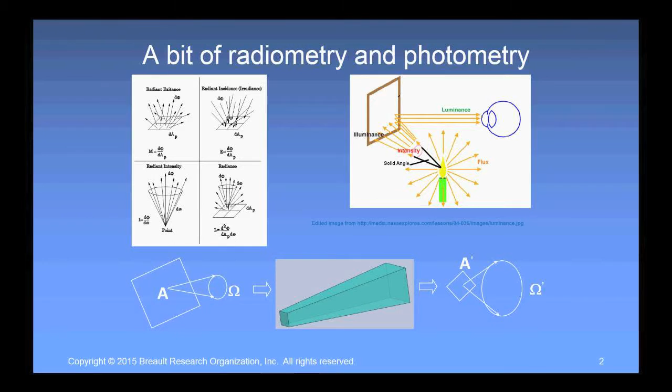And to do that, we're going to take a somewhat brief look, as much as we can within the time frame allotted, at radiometry primarily, and a little bit of photometry as well. We are going to spend some time looking at the terminology, because to be perfectly honest, the terminology can sometimes be the most confusing part of the whole analysis process. And then we'll look within the Apex environment at how we analyze the radiometric quantities, and put them into the perspective of what this data is telling us. So let's talk briefly about radiometry and photometry and what the differences are between them.

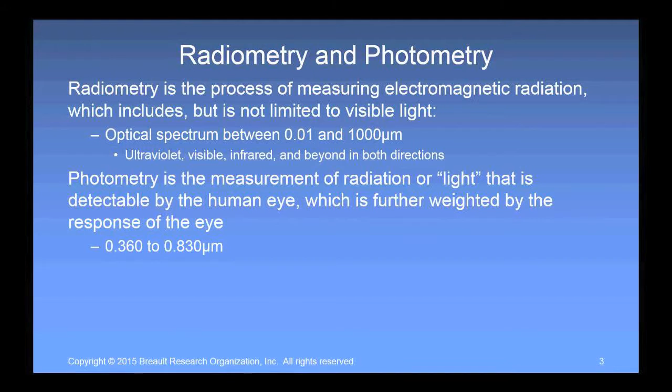So let's take a look at some of the quantities we're dealing with in radiometry. When we talk about radiometry, we're talking about real energy based on the energy in a photon of light. So in radiometry, we start at the most fundamental level, the radiant energy, or the joules per photon. It goes right back to Planck's law. We start with the photon's energy, and what happens to that energy as it passes through time and space?

So you don't always have to say radiant flux. You can simply say flux, and radiometric quantities are typically assumed. But in all honesty, if you want to make sure that people know exactly what you're talking about, I would recommend using the prefix of the radiant. And again, power is also simply often used. And when we're talking about power, we're talking about watts, what comes out of the wall outlet, if you want to think of it in those terms. And based on our fundamental quantity of the energy in the photon, watts is simply joules per second. So how much energy per unit time.

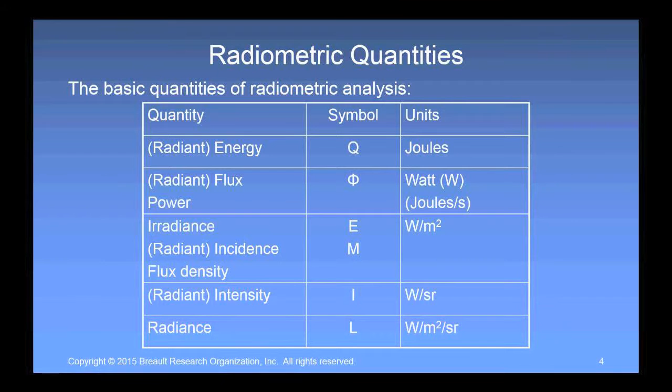So again, just a little bit of terminology. I'll be using those same words when we go through some of the analytical processes. So have that back to refer to. And after this presentation, you'll be able to download this file if you are interested.

So what does this all mean, and how do we apply it to the analysis we're trying to do of our system? And I'm going to say illumination system, but it could be an imaging system or any item that you're trying to analyze within the APEX environment. What I want to talk about is the basic process of transferring radiation, transferring energy. Let's assume we have some small area on our source, and I'm going to call that DA1, and I drew something large enough for you to see, but of course we can shrink these down to infinitesimal size if we want in the limit. And then we have some small differential area DA2 on this region I'm calling my detector. And they may be aligned normally to each other or not, but they're aligned at some angle, theta 1 and theta 2 relative to their normals. And they're separated by some distance s.

What we're trying to determine is how much of the energy that is emitted from this differential area is actually going to be captured on this target, this detector. Right now, it's a simple system, source and detector. Obviously, in the real system, we're going to have many other components involved, mirrors, lenses, etc. But we can still think of it at this very basic system.

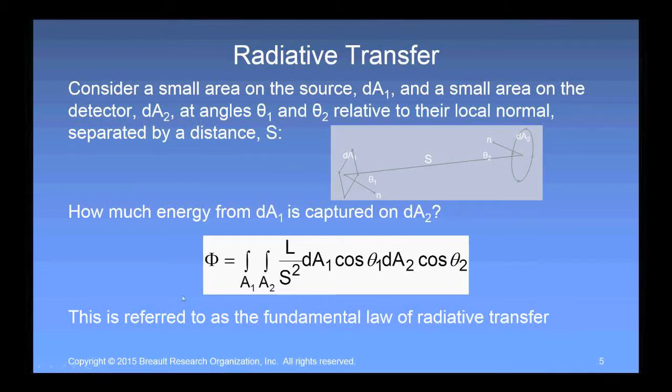So we can look at it mathematically, and we can calculate how much energy from this differential area A1 is captured on our detector by simply integrating over the two areas involved, the radiance divided by the square of the distance, and then the projected area of the source as seen by the target, and the projected area of the target as seen by the source. This particular equation is what's referred to as the fundamental equation of radiative transfer. When you're doing illumination design, illumination analysis, this is the equation you're trying to solve. So let's think a little bit more about what that equation is telling us.

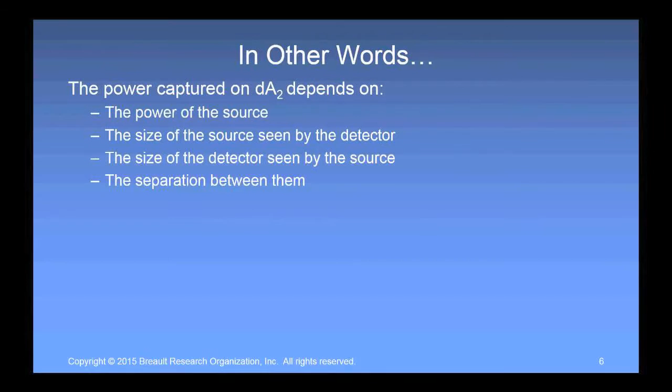It simply tells us that the power captured on our detector, which I'm referring to as dA2 here, is a function of the power coming from the source, the radiance of the source, the size of the source as seen by the detector, the size of the detector as seen by the source, and the distance between them. And those are all, again, for our simple system, parameters we can readily understand and indeed measure.

Now, if I change things a little bit, let's say I give the source some amount of divergence. So the rays will be traveling out at some angle within a forward hemisphere. If I keep a target of exactly the same size, then obviously some of those rays, because of this traveling distance, are going to miss the target. And in this particular case, I believe I just put like a 10-degree divergence here, not quite sure. It was either 10 or 30 degrees, but we could reverse calculate it. We see that only about 86% of our energy makes it to our target, rather than 100% of the energy.

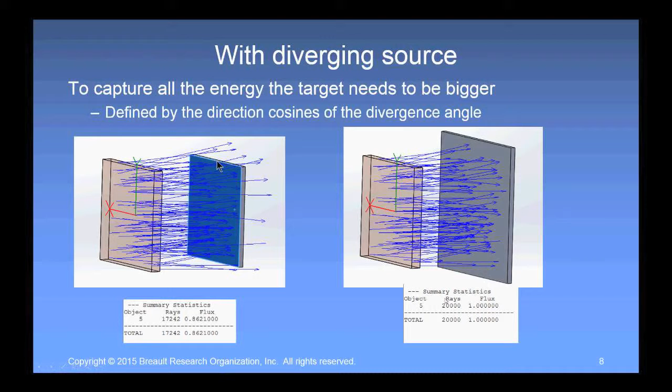Now, I can expand the size of my target to such a point that all of the energy gets captured. I can do that. But in both instances, I'm going to have changed part of my results. In the case of the enlarged target, I did capture all of the energy, but over a larger area, which means the area distribution over the little differential areas on my target will now be slightly different than they were on the source.

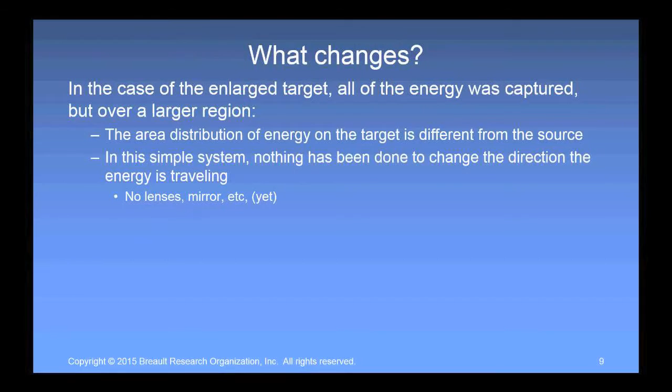And the energy is still going to be traveling in the same direction when it reaches the target as it had at the source, because again, we're just traveling through this ideal lossless media at this point. No lenses, no mirrors, no gratings, etc. But we're going to put those in. But again, things have changed slightly. And sometimes that's what we need to know. And of course, we could add more complexities.

The problem is once our systems become a bit more complicated, when we add multiple components, more complex shapes, for example, faceted reflectors, Fresnel lens arrays, you can't really do a hand calculation and get the answer. And even in that case, for most simple cases, I can get the total power that reaches a particular location, but understanding its distribution in area or angular space is a lot more difficult.

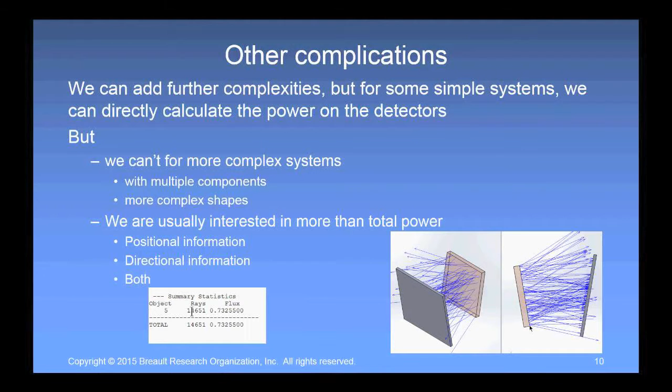And typically, in addition to total power, I do need to know the positional and the directional information. And sometimes I need to know or want to know both simultaneously. So now let's take this back into the context of our radiometric definitions. And I'm going to start with radiance. Although it was the last item in the table, in many ways it's the most important parameter that we might be interested in because it contains all of the information.

It tells us not only about the area distribution of the energy, but it also tells us about the direction that light or that energy is traveling when it reaches that surface as a function of area. So it's power per unit area per unit solid angle. So it's going to tell us how much of the power emitted from our source, in this particular case our surface, our little dA1, will be received within the projected area of the target within some viewing angle in a three-dimensional environment.

So the solid angle of the source as seen by the detector and vice versa. Okay. So again, it's the fundamental quantity in radiometry, because it does have all of the information we need. Once we know what the radiance is, we can capture any other piece of information that we need. So here's the basic definition of our radiance, and it's a function of our power and our projected area, as well as our solid angle. And again, typically in watts per meter squared per steradian. And if I integrate the radiance over all area and solid angle, I get the power.

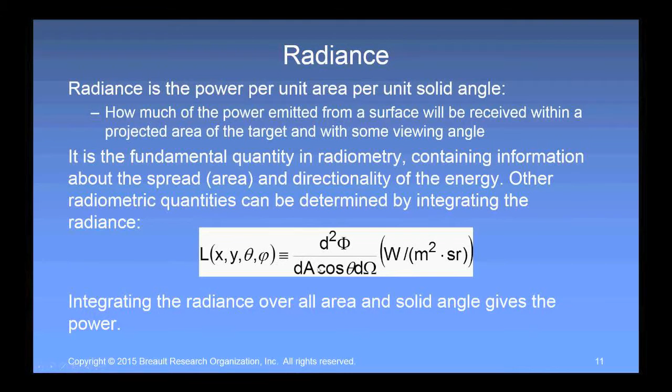If we talk about radiant intensity and the irradiance, the radiant intensity is the power emitted or received per unit solid angle into some specified direction. And we can think of it as the power per unit solid angle, or if we started with the radiance and we integrate the radiance over all area, we will also get our radiant intensity.

If we talk about the irradiance, either the radiant incidence arriving or radiant exitance leaving, it's the power per unit area at the surface. And again, we can think of it in terms of it being the area distribution of the power. So the power per square meter, for example. Or again, if we have the radiance, we can integrate it over all angle space to get the incidence or irradiance. Okay.

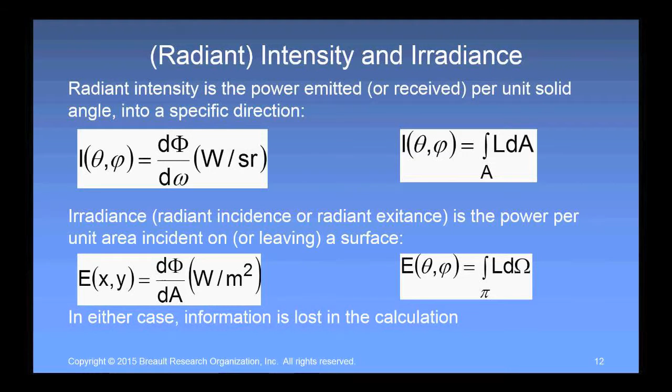The important part to remember is, when we calculate intensity, we're throwing information away. We no longer know where the energy is landing. If we determine the irradiance, what we've thrown out is all information about the angle that the ray is traveling at. So although these are very important and useful parameters, we have to understand that when we calculate these, we're throwing some information away. And that's sometimes where people have questions about what exactly the analysis means. And that's what we're going to be talking about for the rest of our presentation here.

The last item, of course, is our power, or radiant flux. So the energy per unit time, either leaving or being received at a surface. This parameter simply tells us how much there is. It doesn't tell us anything about where it is, what the distribution is, what the directionality is, simply how much there is.

Again, a very useful parameter, probably the first question you want answered when you start your analysis, because obviously if you're not getting enough power to your target location or your location of interest, there's no point in doing much more analysis because you're going to have to go back to the beginning to get more power to where you're trying to get it before you worry about exactly what the distribution is. So those are some of the basic parameters of radiometry.

And very briefly, I'll touch on photometry. Most of the analysis we'll be doing today will be radiometric, simply due to the time limitations. Photometry, as I mentioned, is simply a normalized form of radiometry. Photometric quantities are very similar to the radiometric quantities, but they've been weighted relative to the response of the human eye. So when we talk radiometrically, we're talking about integrating over all possible wavelengths. 0.1 to 1,000 micrometers gives you pretty much all the energy in most instances, but theoretically, it's all wavelength space.

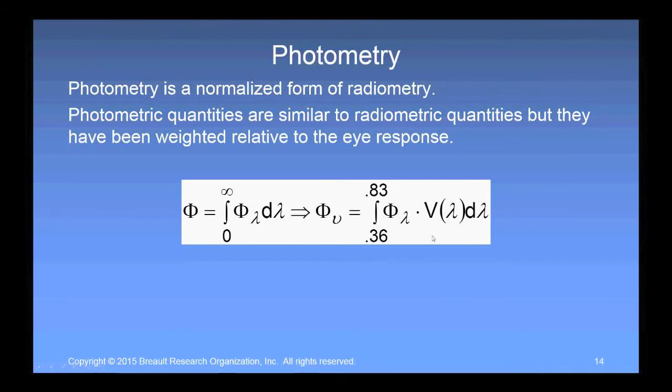But when we talk about photometric power, we're only talking about that from 0.36 micrometers to 0.83 micrometers. And we're going to have the weighting factor to take into account the responsivity of the eye at each of those wavelengths. Photometric quantities, again, take into account the human eye. And if we're talking about photometric quantities specifically, we want to make sure that we somehow indicate that.

And typically it's with something that refers to luminous or illuminance; something related to the word lumen is typically there. So we'll talk about luminous energy, luminous flux, illuminance or luminous flux density, luminous intensity, and luminance. And each of these, you can see, correlate in some way to our fundamental radiometric parameters. But let's start in this case with our luminous flux, which is measured in lumens.

To keep a consistency with our radiometric quantities, that required the definition of a unit often referred to as a Talbot, that is a lumen second. Why? Because when we're in photometric space, we're not bringing things back to a fundamental property of physics, the energy of a photon. We're creating a relationship. So we have to sort of create units to make it work, just to have this correspondence between photometric and radiometric units.

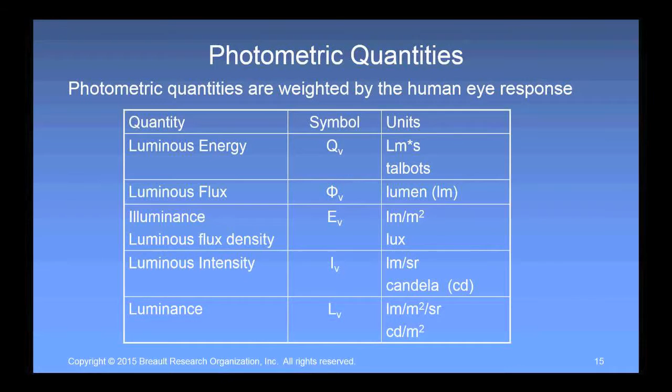And sort of a generalized depiction. I have a source here, and it's a candle because we know candles not only provide light, but candles also provide heat. And heat is a form of radiant energy, but that heat energy is typically not seen by the human eye. So when the light leaves into some solid angle, energy into a solid angle is our intensity, and then somehow it gets mapped into the human eye.

Only part of that energy is actually going to make it through the pupil of the eye to be imaged by the eye or to actually activate part of the sensor system in the eye. But this would be power per area per solid angle, so that would be our luminance. So although the output of the candle is intensity, and if I had an appropriate detector here, I could capture all of the energy within this solid angle, the human eye will only detect a subset of that.

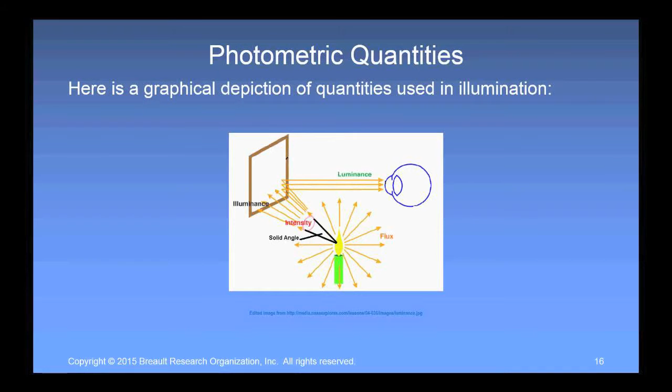So another area of confusion sometimes is converting from lumens to watts. When we talk about watts, we're sort of talking about what comes out of the wall outlet. Watt is a measurement of power used. It does not tell us anything directly about how much visible light is output. We can plug things into the wall and turn them on, and they produce no light at all. My blender doesn't produce light typically. My light bulbs do. But watts is the total power used, which means it's going to include things like heat losses.

Now, yes, other devices have heat losses as well, but heat loss doesn't help us in terms of light energy from a particular source. For example, if I plug in an incandescent bulb, halogen bulb, I'm also going to get infrared and ultraviolet radiation. Some of that is converted to heat. But again, it's light that the eye does not respond to. When we talk about the lumen, it is simply a measure of visible light, the 360 to 830 nanometers.

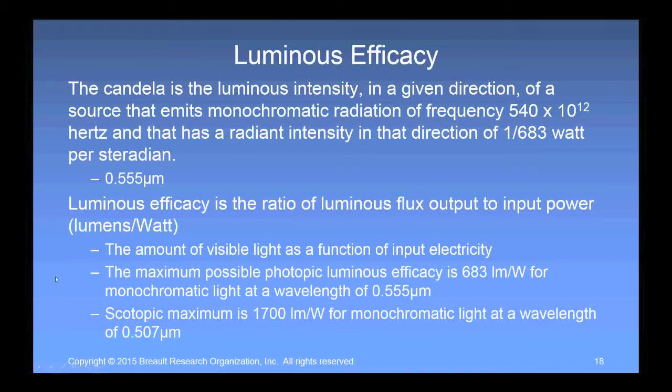The luminous efficacy is the ratio of the luminous flux output to the input power. So it's lumens per watt. So it's the amount of visible light you get as a function of the input electricity. Maximum possible photopic, so bright response of the human eye, luminous efficacy is 683 lumens per watt for monochromatic light at this particular wavelength. The scotopic maximum is 1700 lumens per watt, so that's in the dark environment, but that's at a wavelength of 507 nanometers. So this was all sort of to get you comfortable, I hope, with the terminology.

Now let's take it back to what happens in the Apex environment, where we're going to, again, define our geometry, our sources, trace rays, perform analysis. So how do you solve that really, really nasty double integral?

But I figured since we're presenting this webinar live on a Wednesday, you've recovered from last weekend, you're not thinking about next weekend yet, so your brain should be ready to deal with double integrals today.

How do we solve them? As I mentioned, for simple cases like those square or rectangular planes, things like that, we could actually do the calculation ourselves. But for real systems and even for simple systems, we're probably going to let Apex do the work for us.

Okay. We use ray tracing basically to model the source energy as it emits from the source. What we say is each ray represents one of those little differential areas, and it has a differential amount of the energy. In the sum, all of the rays total up to the amount of energy that's actually leaving the source. When the ray propagates, the radiance of that ray is conserved, again, assuming an ideal lossless medium, like air, we typically treat that way. If the radiance of the source is known at any location, that can be at the source, that can be at some aperture or output location in our light train, but if we know what that radiance is anywhere, then we can calculate it everywhere.

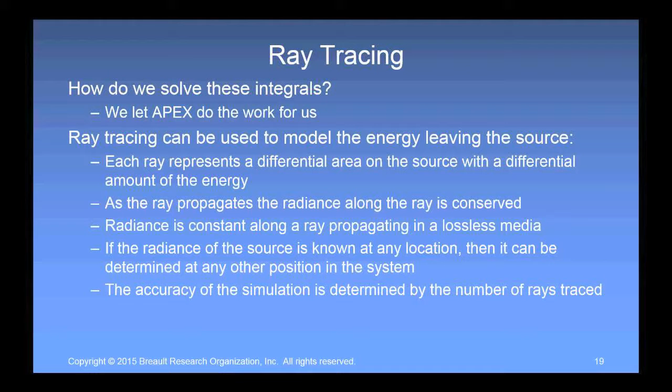So let's talk about the calculations that we might want to make. One is the incident power, the total flux on our detector of some area from our source. And in reality, we're now not just going to talk about area A2 and A1. We're going to integrate over all the detector area from all of the source area. And again, it depends upon the distance between the source and the detector, the angle between the source normal and the detector, and the angle between the detector normal and the source. And voila, it takes us right back to our fundamental equation of radiative transfer. So the total power on the target is the sum of all of the energy seen at all of the points on the target from all of the points that make up the source.

And ray tracing is simply a numerical solution to the integral. The integral cannot be solved in closed form typically. We have to apply sort of a trapezoidal rule type approach, and we do that via ray tracing.

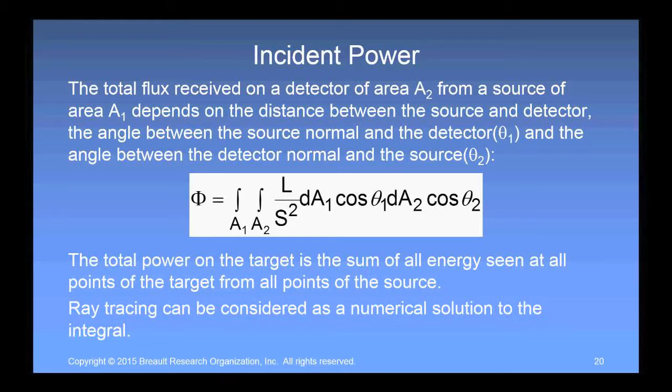So let's take a look into Apex and let's look at some of the calculations that we can perform so you can get an idea of what's actually being calculated or measured when you perform a particular type of analysis. And I'm going to start with a very simple case with a very well-known outcome. I'm going to have a parabolic reflector with effectively a point source at the focus position.

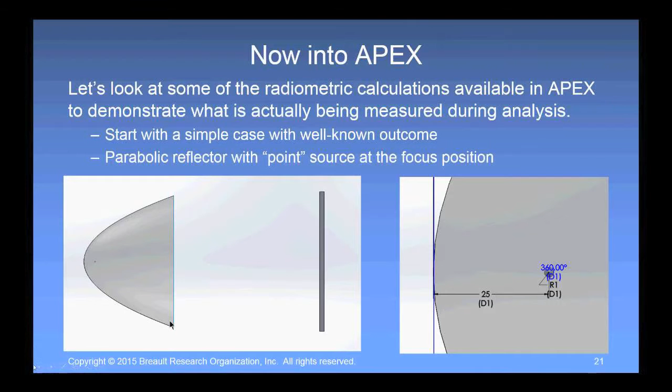So here's what it looks like. Here is my parabolic reflector, has a focal length of 25 millimeters, located at the focus position, so 25 millimeters away, is a tiny spheroid that I'm going to treat as my source with a 1 millimeter radius. And again, effectively, that's a point source. So what I'd like to do now is take a look at the ray trace.

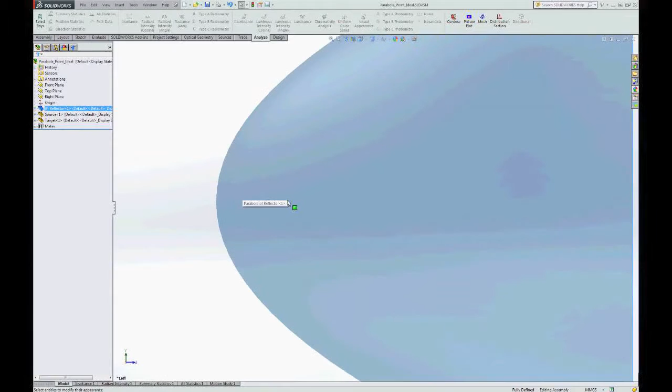And so here's the system set up in the Apex environment. And let me pick my little 3D mouse here so we can zoom in. And I'm going to change the transparency so we can come on in. And there you can see the source at the focus position.

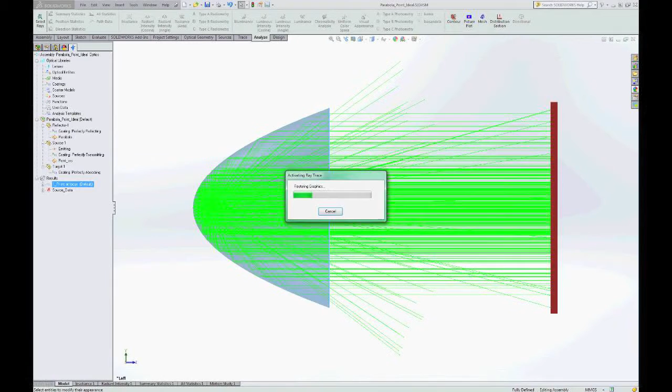Okay. So I have already done my ray trace. Let's end that. So what I'm going to do is bring back that ray trace. And I'll just come right over here and activate the ray trace. And here's the result. And we can see the energy on the detector. And we can calculate that information.

So if I simply come over here and select my target area, if I wanted to come up here and just say summary statistics, it's the quickest way to get it, it tells me that about 92% of the energy actually reached my target. Now, how did my energy reach the target? Well, I can analyze that as well. And there are 3 possible ray paths.

And we have the energy that leaves the source, hits the reflector, emerges all but collimated, and therefore hits the target. And that was about 89% of the total energy. We have some of the source energy that leaves at a small enough angle to be captured by the target, but not a large enough angle in the forward direction to actually hit the reflector. And that was about 2.5% of the energy. So if we add those up, there's our 91.5% of the energy, rough numbers.

But we also had those rays that were leaving at an angle so small they missed the reflector, but so large they missed the target. And that was about 8.5% of the energy on the target. Okay. So now we know how much energy made it to the target. Now what do we need to do? What are the other pieces of information that might be of interest to us?

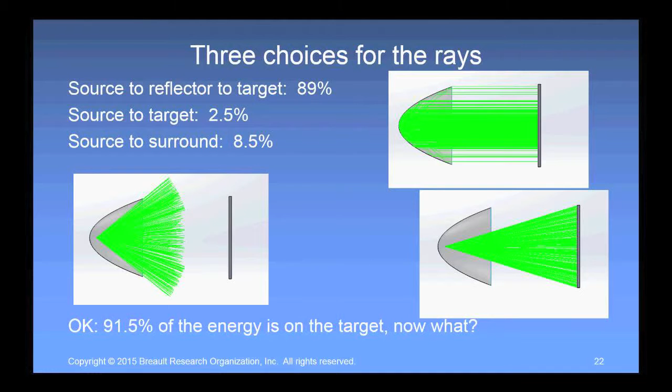So if we look over here on the Analysis tab within Apex, we see a couple of options. And right now, I'm just going to look at 2 of them, the irradiance and the radiant intensity. The irradiance is going to give us the power per unit area across the surface I've highlighted. And the radiant intensity calculation in cosine space will create a plot in direction cosine space, and it will effectively give us the power per unit solid angle.

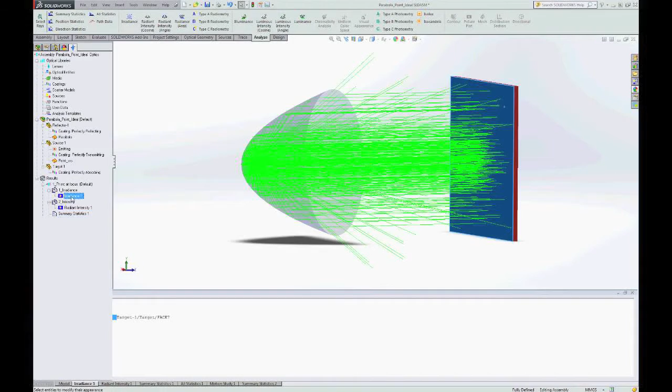I'm going to start with irradiance. What the irradiance calculation tells us is what the distribution of energy looks like across the surface. And yes, I should probably go in here and average this a little bit. And let's make it look real pretty by doing some radial averaging. Should have traced more rays, and now I have that data, and we can see.

And what this allows us to see is that we have a nice rotationally symmetric distribution of energy, as would be expected. You'll notice that it is effectively pixelated, because when we do the calculation, we have the ability to define a data resolution, and I chose 101 by 101 pixels, square target, aspect ratio is equal to 1. So you could do the math to figure out what size each of those little pixelated elements would be and get an idea of how much power went into each of those.

But it doesn't tell us anything about what angle or what direction the light is traveling in. Now, in this particular case, we sort of know the answer to that, but we have thrown out information about angle.

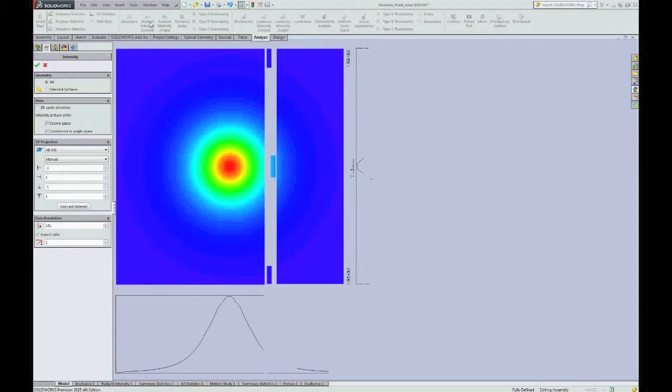So if I want to know about the intensity, or how the light is traveling, not where it landed but how it's traveling, I can do that using an intensity calculation. And I'm going to look at the intensity in cosine space. I've already done the calculation, but I want to pop up the dialog just so we can take a look at it. And you'll notice that I have an ability to convert it over to angle space.

I don't know about you, but when I see a direction cosine of 0.5, I don't think I have a direction cosine of 0.5. I think, oh, that's 30 degrees. That's sort of how my mind thinks, and more often than not, I do work in angle space. So this calculation can do that directly for me. And I can choose to set a range of direction limits, or if I were to choose automatic, Apex will scale it based upon those rays that have the maximum extent.

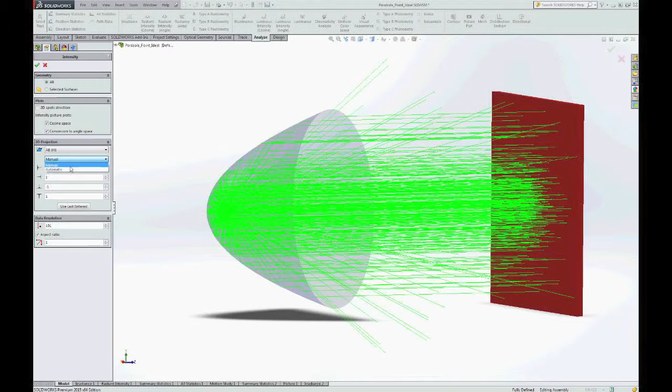But as I said, I've already got this calculated, so let's take a look at our intensity calculation. You'll notice we have a very, very bright peak right here at the center. But the width of the box in direction cosine space goes out to about plus and minus 0.29. Why? Because we have those rays that didn't hit the reflector that are hitting all across the target. So in many of these little areas here, there is some energy. It's just the maximum ray went out at one of these corner positions.

But most of our energy is traveling out within a range of direction cosine space between minus 0.01 and plus 0.01 in the A and B direction space. And I know that because I had 101 pixels. So that's the width of each of those pixels in direction cosine space. Okay. So that's how this size was determined. But again, as we know from our simulation, point source at the focus of the parabola, the light that hits the parabola comes out collimated.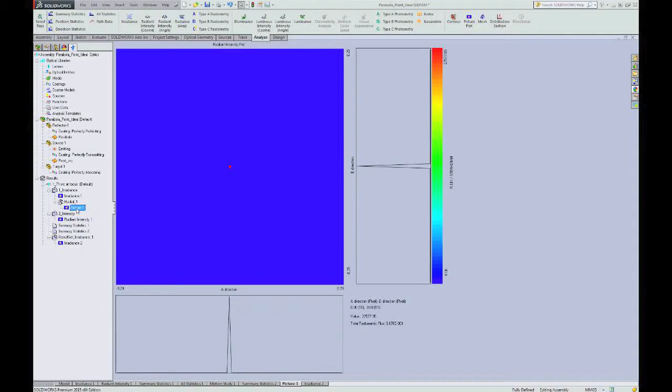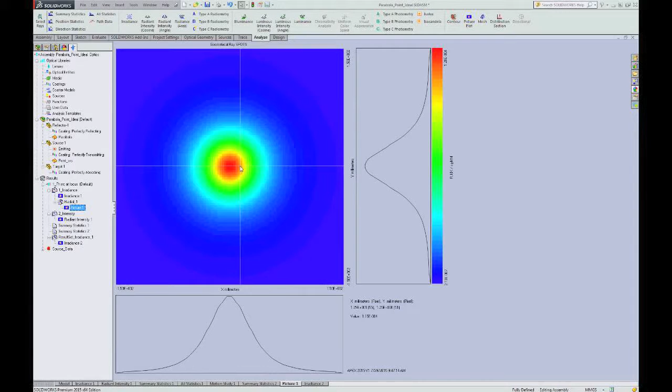Now, there's not a whole lot more we can do with this particular simulation because it's extremely contrived. But what we want to do is understand what these are telling us. What this is telling us is what the distribution of energy is over the surface, and that's it. That's all we know is what the power per area is at each of these individual pixels, and you can read that value over here. Or you can export this data, for example, as an Excel spreadsheet and bring it over to Excel.

And in this particular case, we just know that most of the rays are landing effectively with a direction cosine of 0, plus and minus 0.01 for the bin size. But we don't know anything about where the energy is. Sometimes we need to look at other information. Sometimes there are other types of analysis we need to do. And to do that, we need to complicate the system slightly. And that's what I'm going to do. My initial complication is going to be pretty simple. Let me close this one.

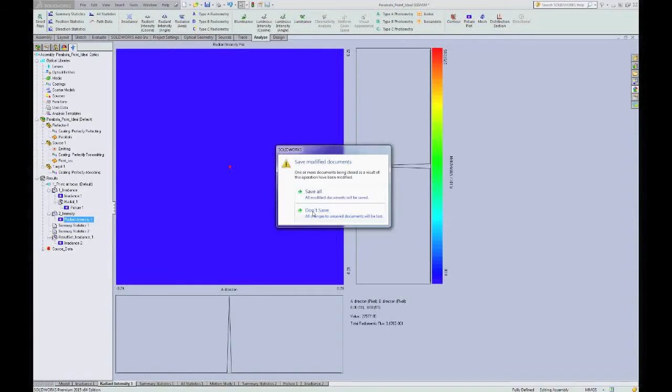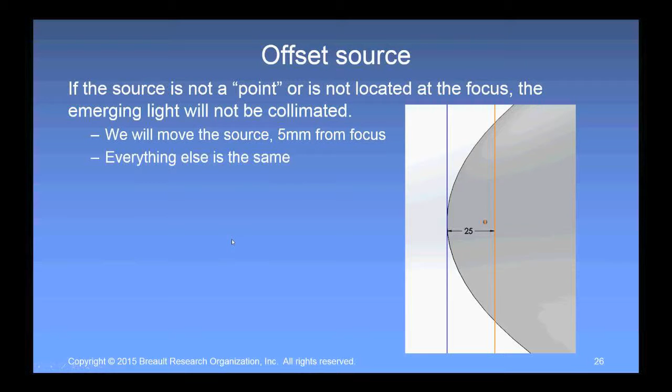What I'm going to do here is I'm simply going to take my point source and move it a little bit. So in this particular case, I have exactly the same geometry, exactly the same source, but I've now offset it closer to the parabola, but still far enough away to be considered fundamentally a point source, by exactly 5 millimeters. And I'm going to look at a ray trace. And again, we're going to get effectively the same result.

About 89% of the energy is going to go from the source, hit the reflector, and then hit the target. About 2.5% is going to leave the source and hit the target. And about 8.5% is going to exit the source, miss the reflector, and go off into space. The key differential is we don't have collimation. You can notice by looking at these rays, and yes, we're looking at a two-dimensional projection of three-dimensional space, but you can see these rays are definitely not collimated. You can see the little kinks in it.

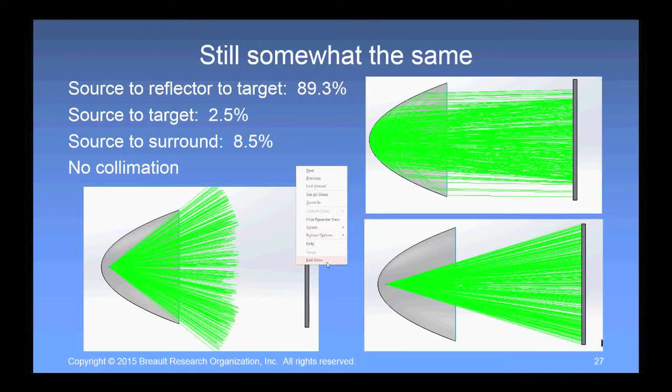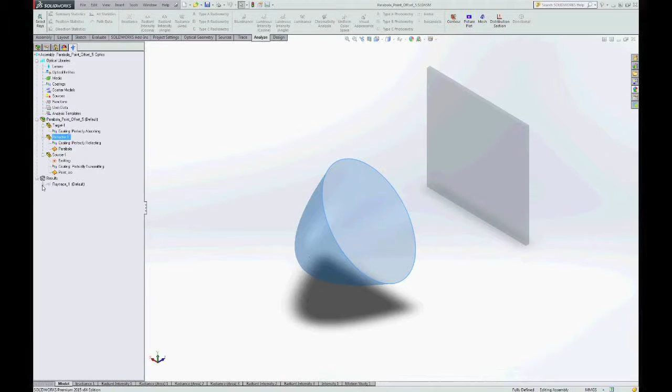So how does that change affect the distribution of energy at our target location? And again, let's take a look at it in that space. I do have the ray trace already here, so let's activate my ray trace.

And here we go, and we can see the rays going off into space, and we can look at it in this orientation. And you can see this ray is somewhat collimated, but not really. And we definitely see that this is not collimated light. So how does it affect the energy on the target? Now, even just looking at this limited number of rays, you might start to think you're seeing something.

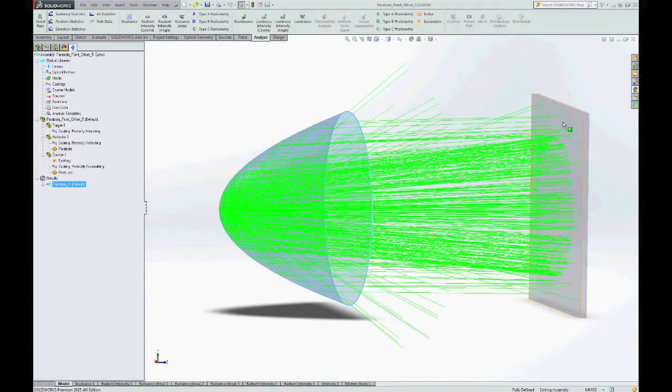And again, let's take a look at the irradiance. And I'm going to use my same resolution of 101 by 101. And again, I've already calculated these, so let's take a look at the irradiance. And here's what the irradiance looks like.

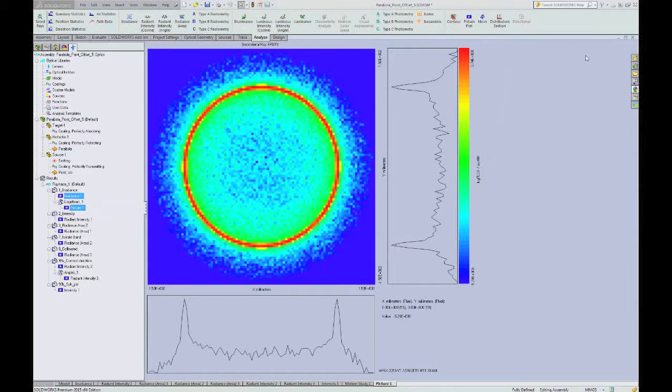So now let's take a look at what is the intensity distribution. At what angle are the rays incident on this surface? And again, I'm going to go to my radiant intensity calculation. And again, we can limit it to the range of all of the rays that are being captured on the target. And let me take a look at that there. And there's what the data looks like.

And in direction cosine space, it's about plus and minus 0.28, effectively almost the same as it was previously. And we see we have a narrow zone here where no energy is reaching the target. You'll also notice right around an angle of 0, the pixel where all of our energy was in the previous simulation, it's now totally empty. Why? Because I don't have a point source at the focus of a parabola. So none of the rays are being collimated.

The only light that can possibly hit right here would be a small number of those rays leaving the source that actually were coming out collimated by definition from the source. So again, we wouldn't expect to see anything there.

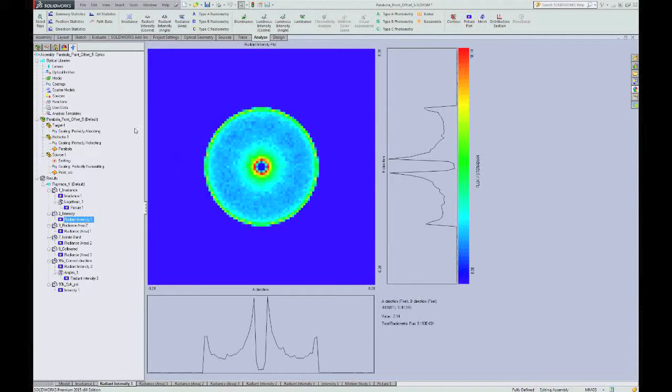Now, just as an aside, when we come up here and we did radiant intensity, I didn't in this case, but remember I mentioned previously you could also convert it to angle space. And I didn't mean to do that one, but that's okay because that's what it would be out to 90 degrees. So I'm going to delete this one temporarily. Okay.

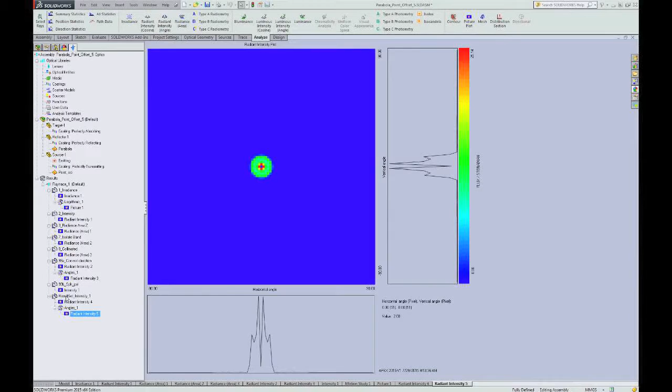There also is an option to do a radiant intensity calculation in angle space directly. And if you're working in angle space, then this might be a preferred option. If your source has a distribution, or if you're looking at something over a hemisphere, you definitely need to use this calculation because it will allow you to do things in a spherical polar coordinate system, but you can capture data over up to a sphere.

As some general comments, which do you want to use and why? When we do the direction cosine data, the data is going to be captured into bins that have an equal width in cosine space. So in our particular case, when I did this 101 by 101, each bin has a width of about 0.02, again, in direction cosine space.

As we know, a sine function is not linear, but out to about, say, 30 degrees, we can treat it as linear. So if we convert from direction cosine space to angle space over a small range of angles, we're not going to have much error.

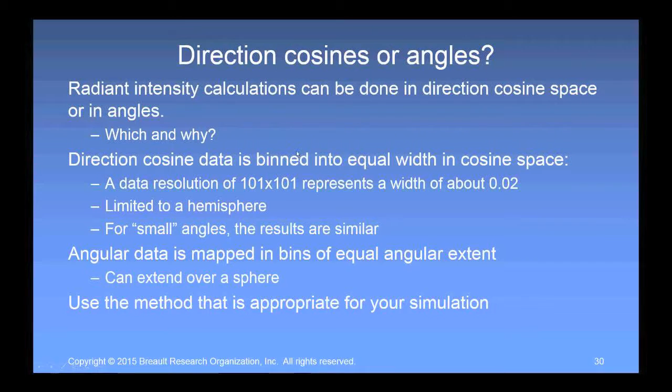But if we have much higher angles, if we go beyond a hemisphere, then we really should be mapping the data into angular space. It's up to you to determine which method is appropriate for your simulation, but again, the tools are available to you. And in this particular case, here is the radiant intensity converted to angle space, and here is the direct calculation in

angle space. Oops, sorry, wrong one. Got to grab pictures if I want to duplicate them. Resolution isn't quite the same, but close enough. And you can see that in this case, the data is effectively the same, so it doesn't matter.

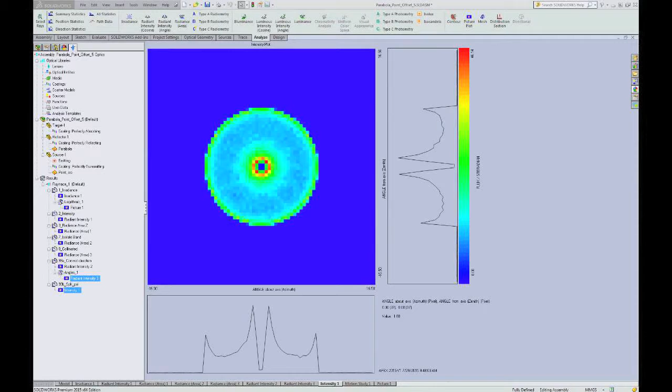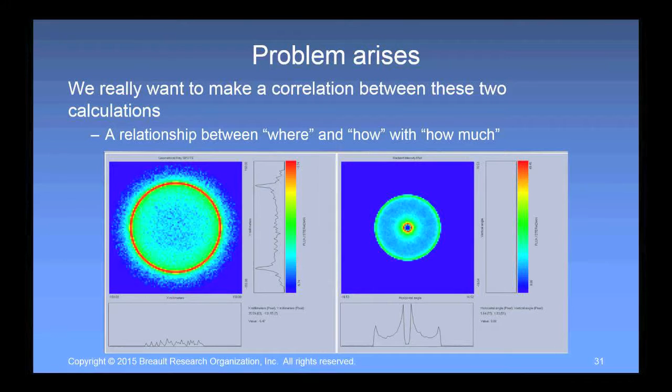Right? But what do we want to do? We want to try to, in our mind, understand what these calculations are telling us. We want a correlation between the data, a relationship between where the data landed and how it got there, combined with how much is there, the power. We can look at these and say, okay, we can pretty much guess that the rays that reached out here were traveling at this angle. But how do we find out how much that was and any other type of information we're interested in?

So this is where we would do what's called the radiance calculation. The radiance area calculation allows you to divide the target into small areas, and then you can query each of those areas as to how much energy landed within some range of angular space. Okay? So let's take a look at our case, and in our situation, we obviously, with our target plane, only need to sample up to a hemisphere, but again, the calculation can go beyond that. Let's take a look at the results.

So here is my radiance, and in this particular case, I calculated it over all angles, so it should be identical to my initial irradiance data because I'm capturing exactly the same information. At each of these same pixelated areas, how much energy came in at all possible angles. But I'm interested only in the energy in this region. So I can go in and say, and let's see, did it tell me here? Nope, it didn't tell me.

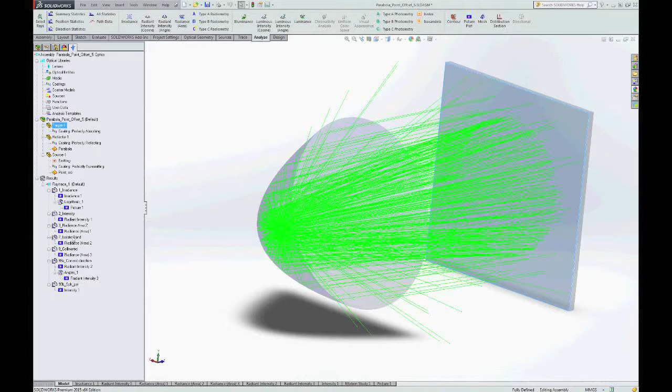Okay, in this particular case, what I did was I looked at the energy that came within a region, those angles between, I believe, 3 and 7 degrees. So you can see that the rays that came out at between 3 and 7 degrees landed at that zone. Again, this is area. This is minus 150 to 150 in millimeter space, but it's telling us about all of the energy at that area that was between 3 and 7 degrees.

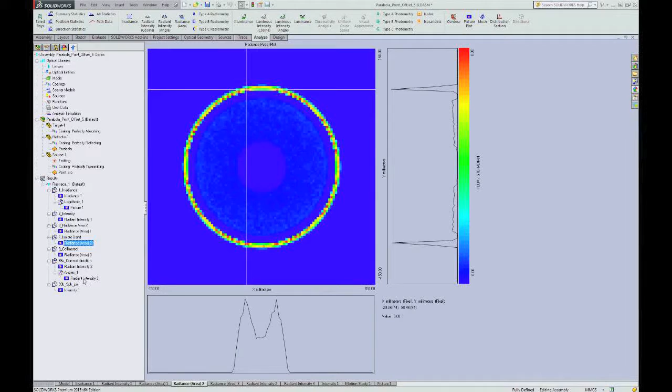If I want to find out about the collimated data, that's not the one I want. This is the one I want. In this particular case, what I said was, show me all of those rays coming out at an angle of less than, I think, 2 degrees. So we have some of the light coming directly from the source, and then maybe some of the rays that hit the reflector.

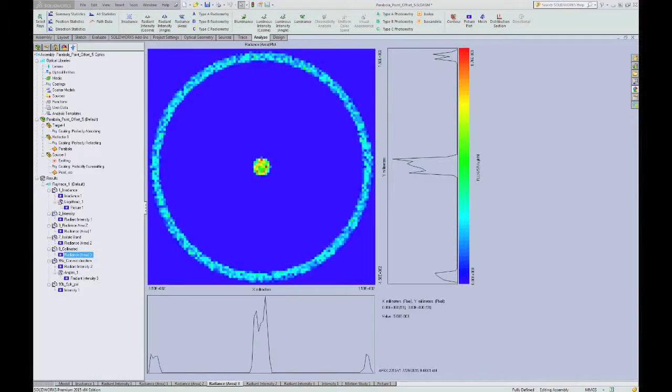That pretty much concludes what I wanted to talk about today. But again, what the radiance calculation allows you to do is to isolate the information in whatever way you would like. So again, here's looking at 3 to 7.5 degrees, and we see some of the light in the center as well. So some of the other light that hit the reflector, but we also see most of the energy in that hot zone is within that range of angles. So that's a little bit about some of the radiometric calculations that can be performed in the APEX environment.